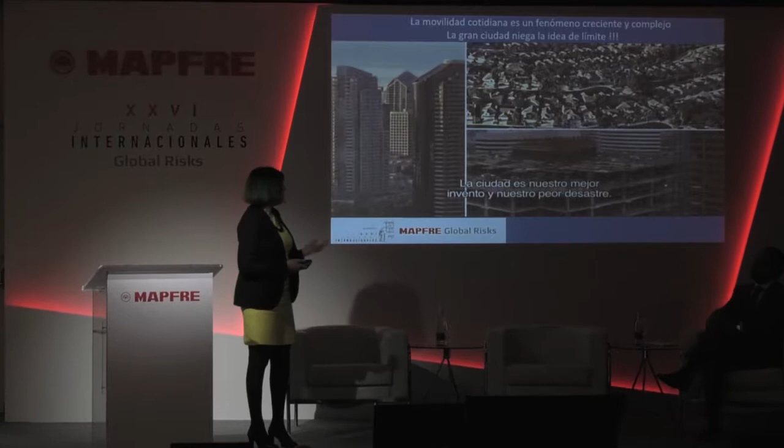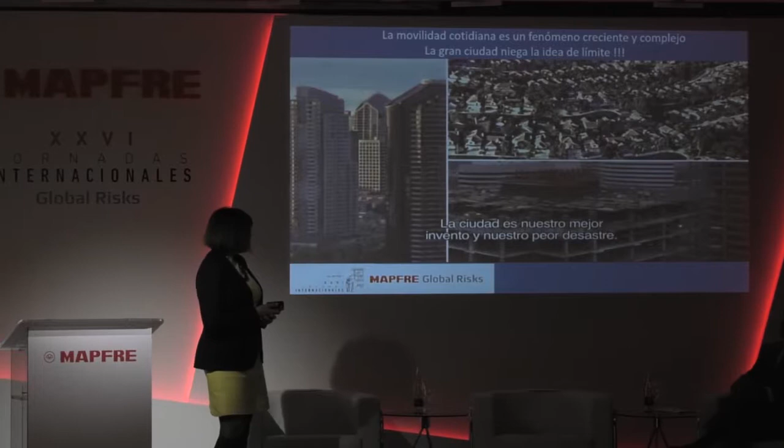I want to start saying that in 2050 in the world there will be over 9,500 million people, and these people will live in cities. 75% of these people will live in cities. Daily mobility is a phenomenon that is growing and it's very complex. It's something that is part of our daily life, and cities in general don't have a concept of limits. Cities expand like gas. Here we have images of different cities. We have skyscrapers and more low-rise cities. So cities grow and grow and grow.

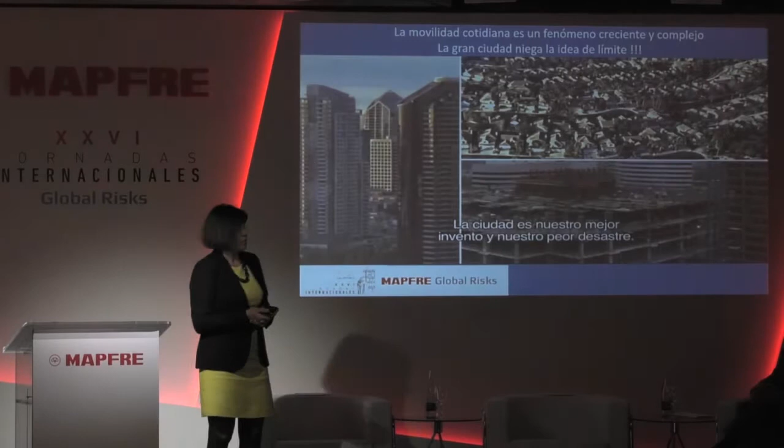And this has happened in Peru. People from the mountains moved to Lima, and Lima has grown very much in a very short period. So this urban sprawl, if not organized, can cause problems, because although cities are our best inventions, they are also the worst catastrophe. Why am I saying this? Because cities, as we know, create waste, pollution. We need to figure out mobility.

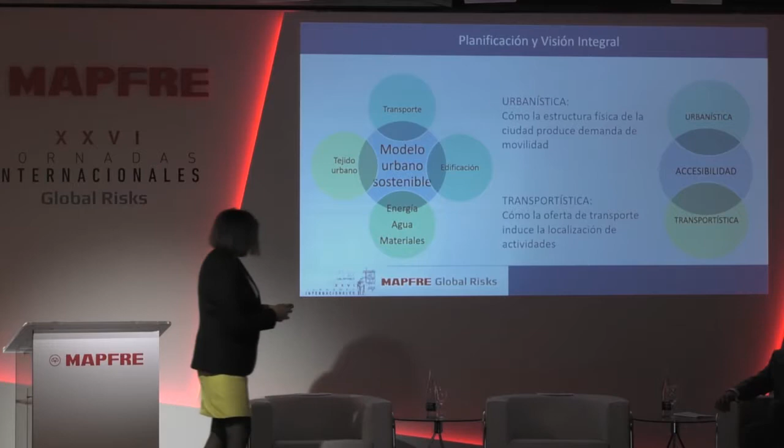What we need to do is plan with an integral vision so we can have a sustainable urban model where urban planning and transportation are coordinated. We cannot have land planning that seems correct without thinking of transportation. Land planning as a physical structure has demands, and if you offer transportation for a territory that's not planned, eventually there will be human settlements because the service is there. So these two disciplines need to go hand in hand, connected to services.

When we talk about mechanical transportation, more specifically private cars, they account for 35% of all CO2 emissions and greenhouse effect, which is one of the main causes of climate change and one of the main uses of non-renewable energies. So the environment and mobility are two very important concerns.

Multilateral entities or bodies have these as priorities. Accessibility, as you know, as the response to different barriers, physical, economical, and social, mobility is conditioned by a series of space and time conditions.

When investments in transportation improve accessibility, we realize that everywhere in the world, in all cities, lots and buildings increase their value. So when there's accessibility, the price of lots increases.

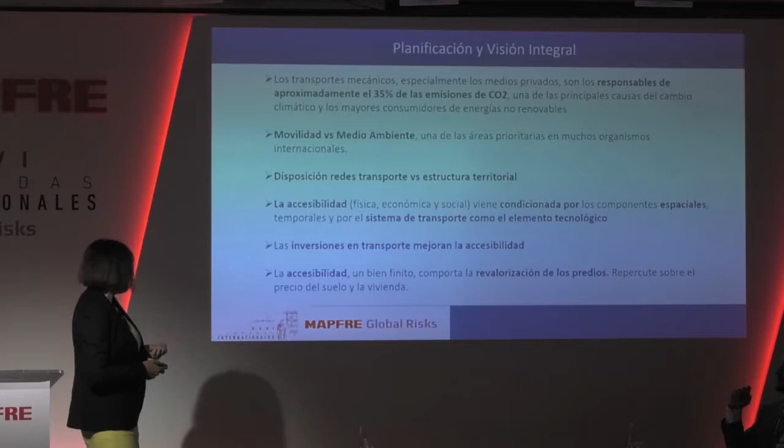An investment in transportation will favor a specific area that will be served, and in that area, assets will gain value. So correct planning is necessary.

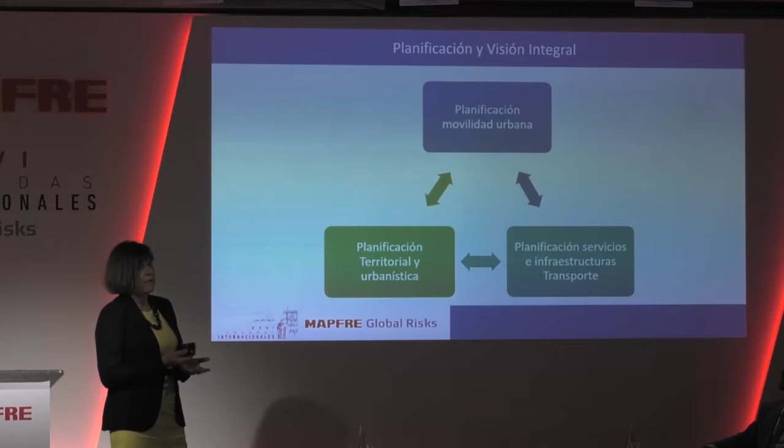So we need planning of urban mobility, territorial and urban planning, and planning of services and infrastructures and transportation. All of these three aspects need to go hand in hand.

I'm going to talk very briefly about a few examples before talking about Lima. For example, London: since the end of the 19th century, London already had a subway system. This is the London Tube network. It's a very important network, not only in terms of kilometers served, but also in terms of how it is planned, due to its long history and good planning.

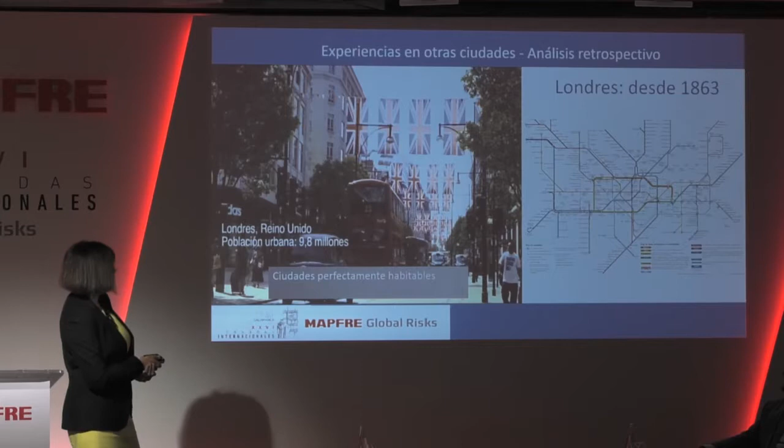This accounts for cities that are perfectly habitable. Subways have all the advantages and no inconveniences - we will talk about the inconveniences later. London has close to 10 million people, like Lima. Lima has 10.5 million inhabitants, but the difference between the two cities is very different. London solved this issue a long time ago.

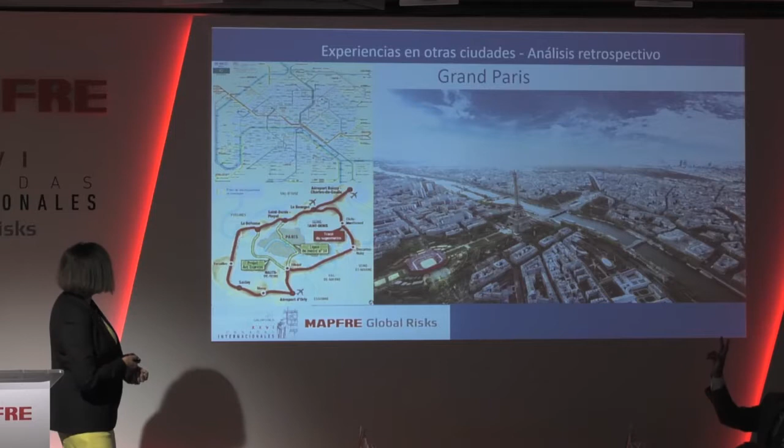Something I haven't mentioned is that networks in cities that have had a subway system for over a century used to be axis-based from the center, because you had the feeling you had to go to the center of the city to do anything. But over time, we realized this is not the case, because going to the center isn't always the most convenient way, sometimes it makes the trip longer. So a ring is being designed in Paris - they already have a peripheral surface train, but now an underground ring is going to be added.

Here we have a more modern subway, the Seoul subway. Together with Shanghai, Seoul has one of the largest networks in the world. It has almost 1,000 kilometers, and they were inaugurated in 1974. Countries like China and Korea, when they start doing something, they do it big time and surpass everyone.

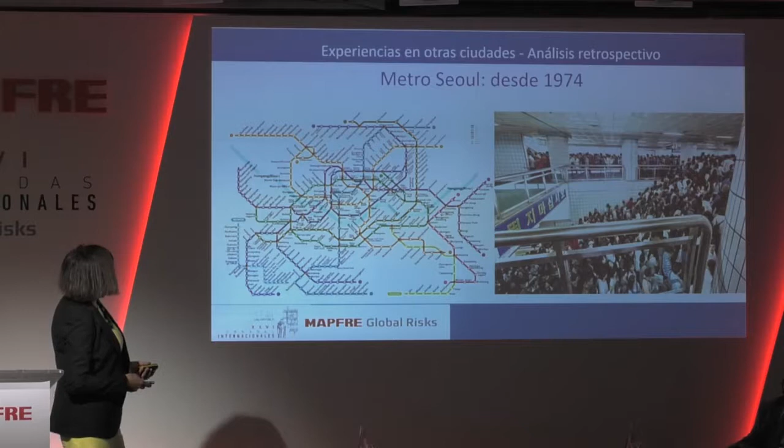Here we can see this hive of networks. It's not that axis-based. The advantage of starting late is that you can learn from the mistakes of your predecessors.

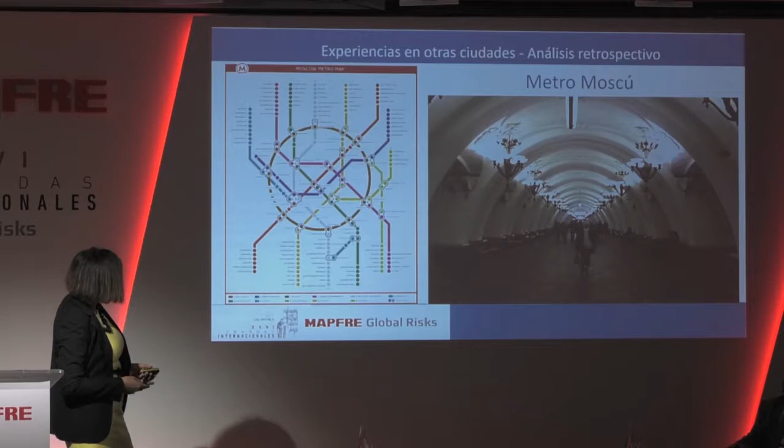This is the subway of Moscow. It was very axis-based, but then it created this ring. So the initial network was based on axes or radii, and then it created the ring. And the aesthetics of the metro are just amazing.

We also have other transportation systems, because it's not only about heavy subway. We have other types of transportation that work for short distances. Subways have stops that are usually not longer than 1 kilometer, stopping and going constantly.

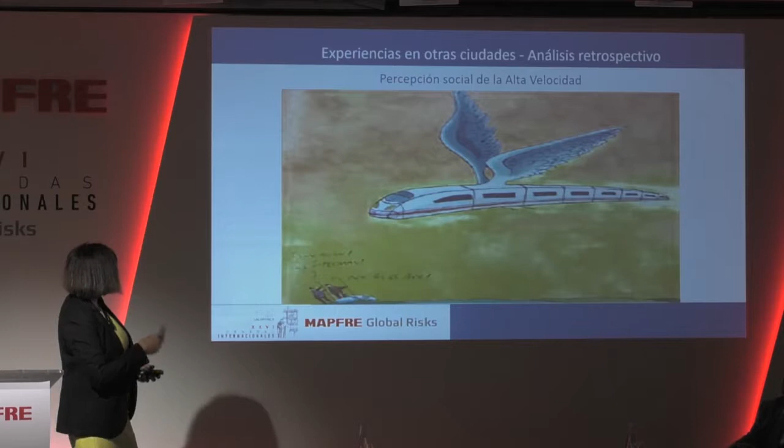So for longer distances, this type of solution wouldn't make sense. We have high-speed trains, great for large distances. Whenever I show this image, I try to explain how people think of high speed. It looks like Superman, but it's not Superman, it's a high-speed train.

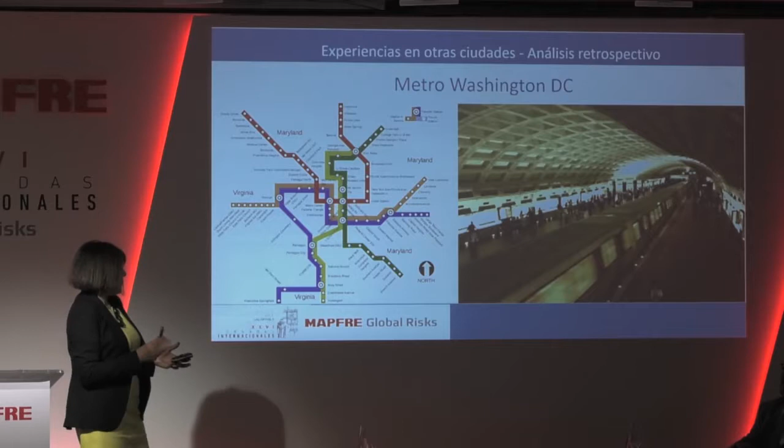Here we have the Washington subway. I visited the city for different reasons. Its aesthetic is really beautiful, very similar to the Central Railway Station. It's very limited because the city is not that large, but the network is adequate.

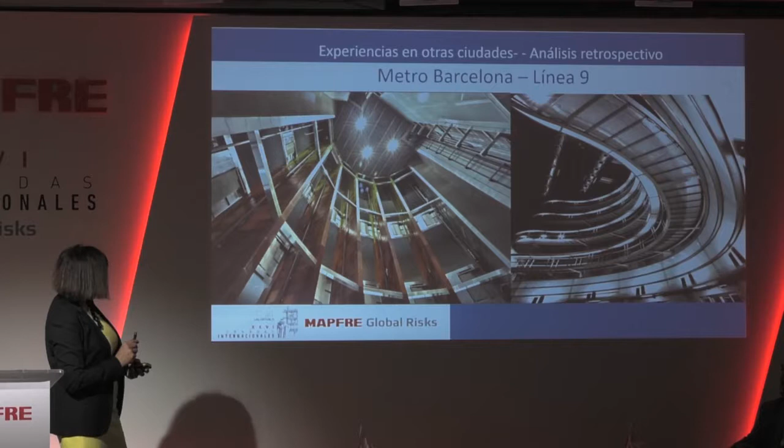This is the aesthetic of the subway in Barcelona. I'm a Barcelonan native, and we're very demanding when it comes to design.

Then we have tramways. Transportation is meant to respond to specific demands or issues, and we can't use solutions that are too big for what we have, like having heavy metros in a city of 500,000 people, because that would be wasting public funds.

When we talk about BRTs, these are just off-the-road lanes for buses. Here we have two examples: Bangkok's BRT and Bogota's BRT.

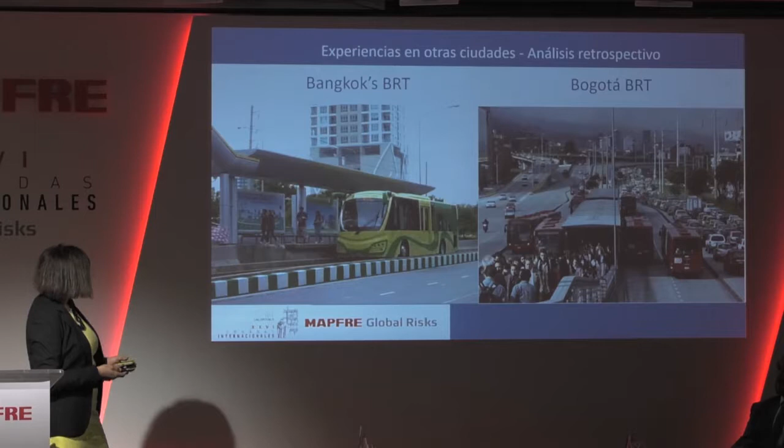I don't know if there's anyone from Colombia here, but they've been in Bogota, and they've been going back and forth on what the solution can be. But BRTs together with subways and other different means of transportation will end up solving Bogota's transportation issues.

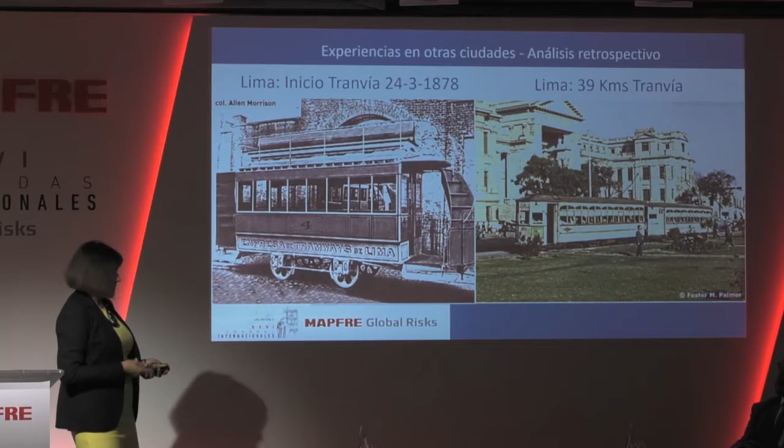Lima had one of the first tramways. It's very interesting that in 1878 it already had a tramway, and it had 40 kilometers of tramway that went all the way to Chorrillos, a place where there were waterfalls near the coast.

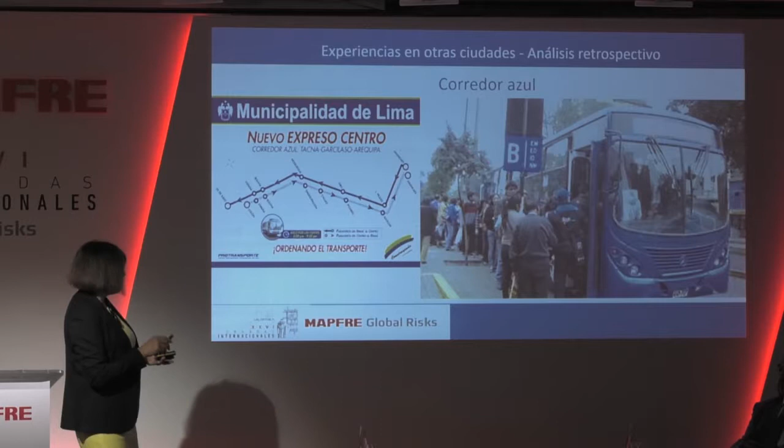We already have an off-road lane — a BRT, which is solving some of the problems. Lima already had buses too, the so-called blue lane buses.

When Line 1 was designed as an over-the-road, elevated line, it creates an architectural barrier in the city. That's what happens to elevated subways. Tramways are different. Tramways are smaller in terms of the cars.

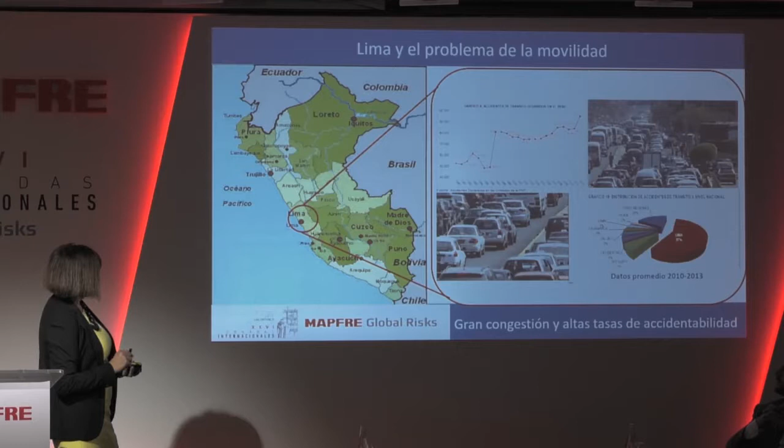We have seen different images of how chaotic mobility is, and here we have some figures of traffic jams. So it is really in desperate need for a mobility change.

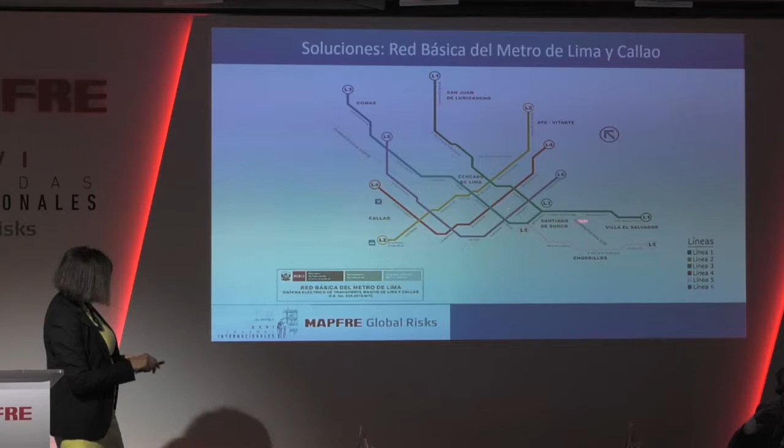Here we have the mountains, and here we have Line 1 that runs from north to south, and Line 2 runs from east to west. Then Line 3 has been planned, along with Line 4, Line 5, and Line 6.

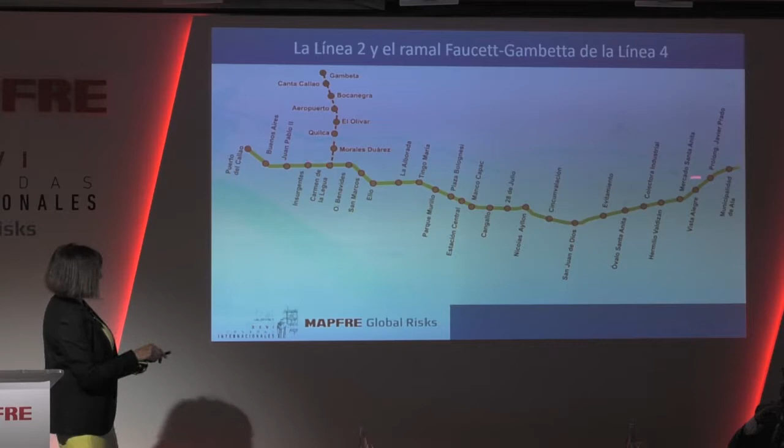If we zoom in on Line 2, here we have the north, so it runs east to west. It runs from Ate to the port of Callao on the coast, through very centric and emblematic places like 28 de Julio, Plaza Bolognesi, which has lots of examples of heritage, and Estación Central, where the Museum of Lima is.

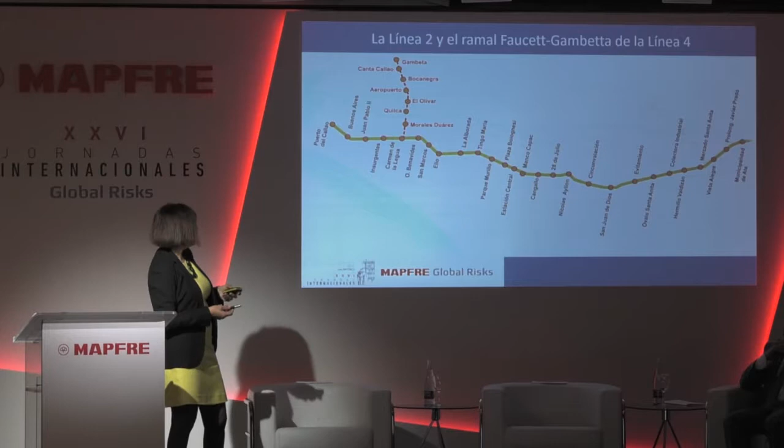Then we have another station, Carmen de la Lengua, from which there will be an additional parallel line all the way to Gambetta. This line is destined to serve the airport, and it's not known yet whether there will be an additional shuttle or how it will be connected to the airport, but that additional line will be connected to it.

So there was a tender, and it was awarded to a consortium with broad experience on a world level. It's led by the ACS group. Iridium is the brand in charge of the tenders of ACS. I work for Iridium, and Dragados is ACS's brand when they're building. Those are the leaders of the consortium.

Iridium has been the first company to receive awards for 13 years in a row. Then there are other companies: FCC, COSAPI, Ansaldo Breda, etc. Salini Impregilo is in charge of different aspects. Ansaldo STS, now Hitachi Rail, is leading the strictly railway infrastructure, and Ansaldo Breda is in charge of all the rolling stock.

Actually, the trains are built in Reggio Calabria, Italy, and they come by boat through Panama to Lima. This consortium has over 3,600 kilometers of experience, many of which have been made with tunnel boring machines.

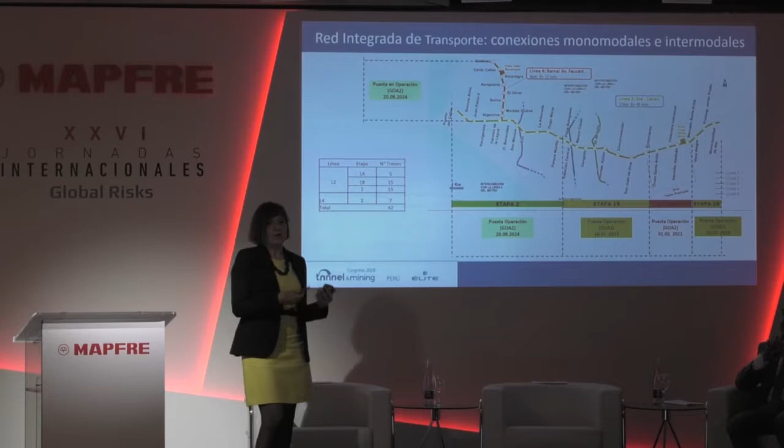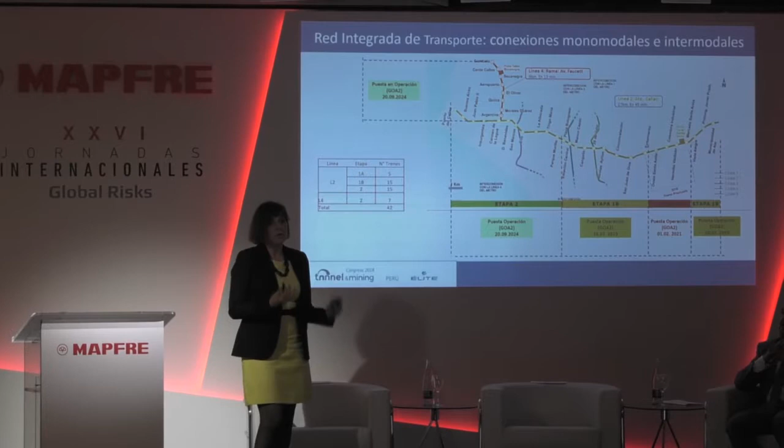If the concessionaire were here, he would say otherwise. But the person who provided us maybe was not ready to tackle this type of infrastructure and did not have the know-how, or did not calculate properly how long it would take to deliver those terrains free from taxes, free from loads.

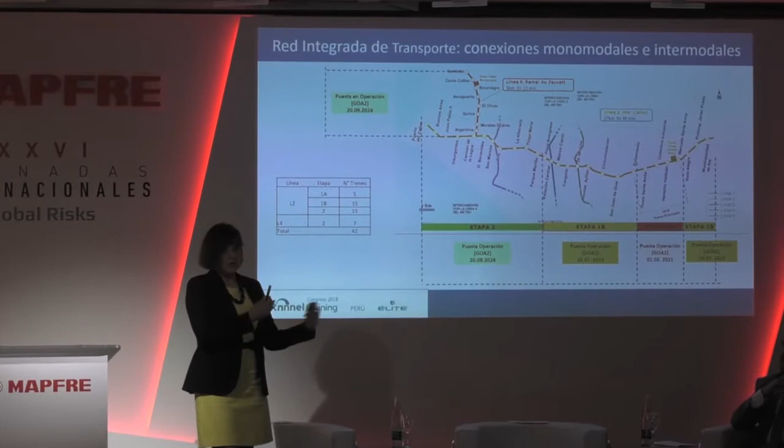Because we are not talking about places falling into a category of eviction. Some of them were experiencing problems with sewage. We have optic fiber, and different areas where water pipelines are crossing. So this is not something you can manage overnight.

And when you have to hand in the terrains, obviously they were not clean from all these different types of services or interferences. That's why there's been a great impact on the critical route. It could have an impact on other activities that were not part and parcel of this critical period.

But anyhow, as of today, we have committed ourselves that on the 13th of December last year, there's been an addendum that is zero. There is going to be no increase in the price.

In this case, the license is a price that has been set or fixed. It's a key that they give you in hand. If they don't ask you to provide extra works, the risk for building is just your own. If the terrain is better or worse, that's it. If it's worse, then you will have to put up with it, you will have to invest more money. But you cannot claim that the person who gave you that should pay you more money.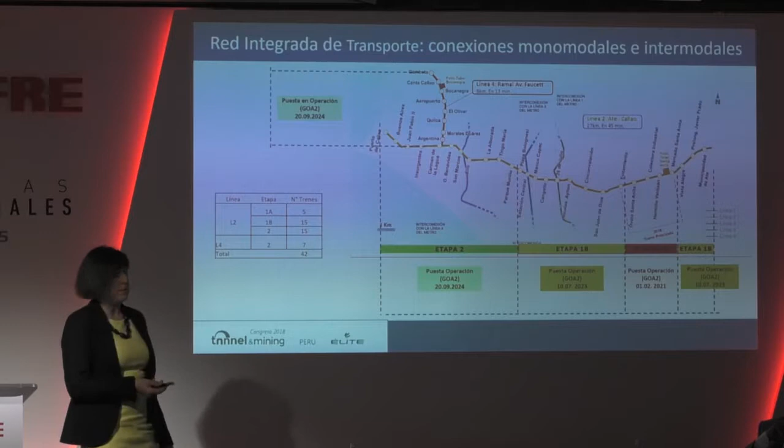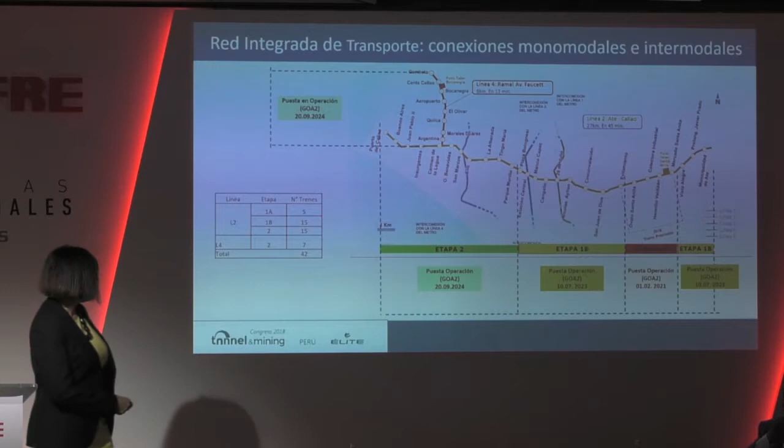July 2023, and final part is September 2024, always in GOA 2. This is going to operate with a fleet of trains that are initially 42, manufactured in Reggio Calabria by Ansaldo Breda, now Hitachi Italy, with 5 trains distributed for that first part.

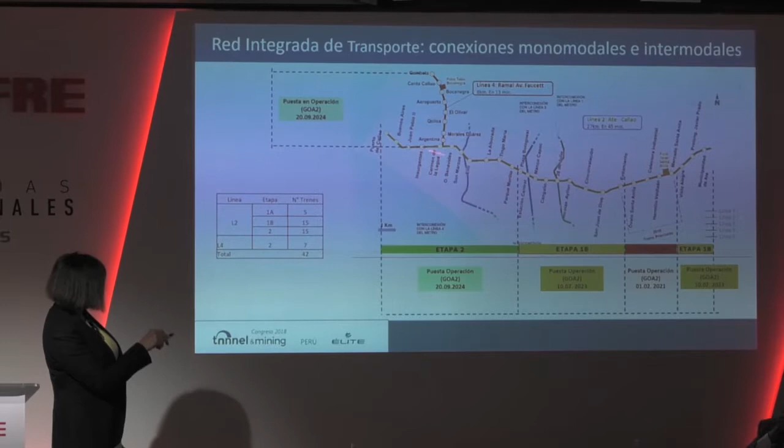They're going to be circulating. We also have a reserve of 5 for the next phase. 15 plus 5 is 20. Another 15 for the second phase of line 2, and 7 that will go through the branch. So 42 in total. But this is not the total amount of trains we're going to count with, because the demand is not the same at the beginning as at the end. So these 42 trains may turn into 72.

That's why infrastructures are being built accordingly. The trains have 6 coaches, and maybe they're going to have a 7th one if necessary.

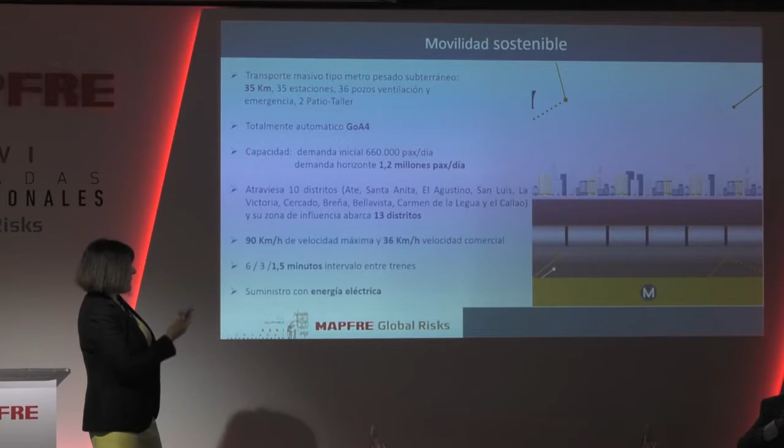I had already told you that this is the first heavy subway, totally automated, from Peru, with these 3 features. Very few in the world are like this. We have a lot of heavy subways, but they're GOA 2, not GOA 4. There's a lot of light subway that's GOA 4, but it's not underground and it's light. So really having these 3 features is going to be a unique example.

Our initial demand is 660,000 travelers a day, but the horizon demand is more than 1 million. For example, in Barcelona we have 11 lines, 100 years old, and among all these lines it carries 1 million passengers a day, around 365 million a year.

That means Lima is very much delayed as far as metro is concerned. They should have had a subway a long time ago. Right now there is only 1 line, and 1 branch has a forecast of 1,200,000 people, which is not something logical.

It crosses different districts, but it provides service to a railway influence area of 13 districts, which is 2.5 million out of the 10 million that live in Lima.

The maximum speed is 90 kilometers an hour, but the commercial speed is lower because the stations are nearby: station, tunnel, pit, and so on. Gravity centers, and the same for pits, there is about 1 kilometer of distance. So the commercial speed is obviously lower.

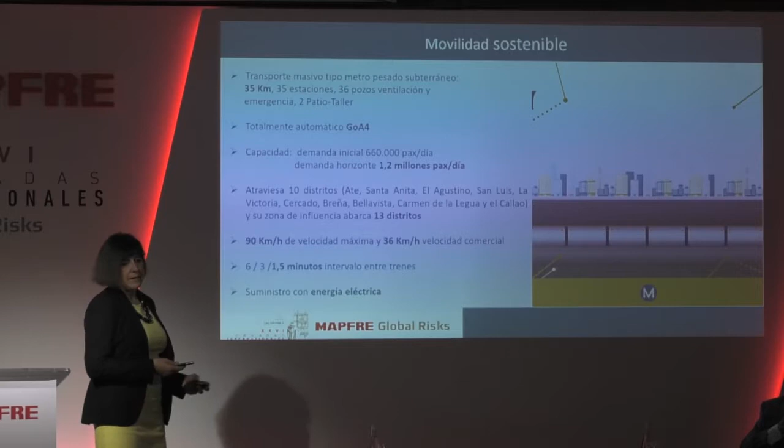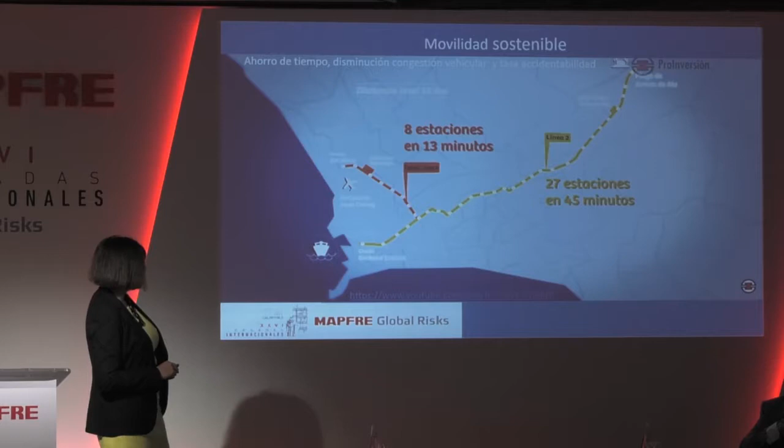This runs with electricity, which is clean energy, and it supports sustainable mobility. Going from one side of the line to the other has normally been done in 2 hours, and now it's going to be done in 45 minutes, and the branch is only going to have a trajectory of 13 minutes.

We believe that this line is going to improve environmental quality. There are no greenhouse gases in the equation, and no other type of pollution such as visual or acoustic pollution. If we want to recover the surroundings, and there are policies for doing that, we can make it a more friendly environment for everyone, for all the inhabitants of Lima.

Universal accessibility is a key factor. There is always something adapted, maybe not necessarily for a person in a wheelchair. Anybody can be a handicapped person because they broke an ankle, or because they are carrying a pram, packages, or suitcases. Also, for people with visual impairments, they're going to use different types of cues so they can walk, and that's going to be an improvement in quality of life.

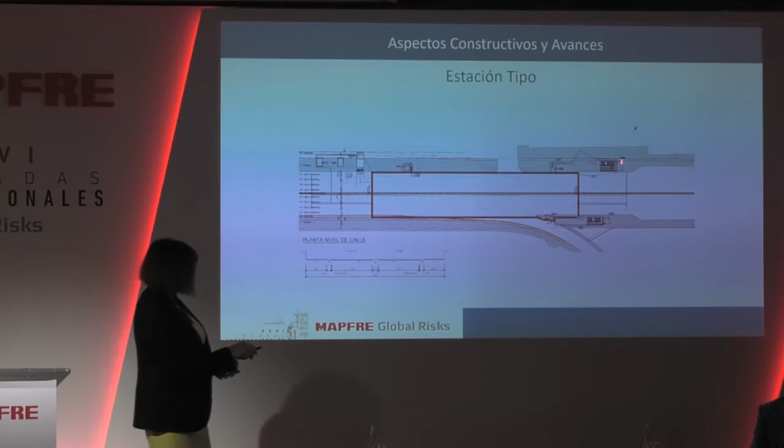Here we would have the tunnel, the exit, the station. We have a series of boxes that are buried, with those elements being the only ones we shall see on the surface of the city, which are access points, staircases, lifts, emergency exits - something that's totally level with the surface and is inserted in the city. All types of materials, cables.

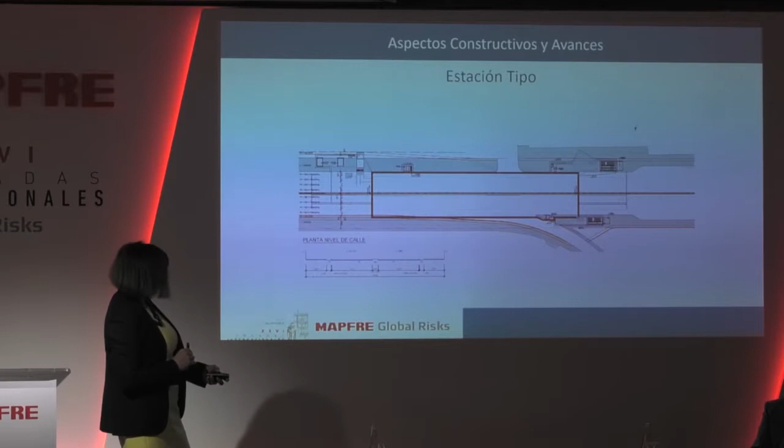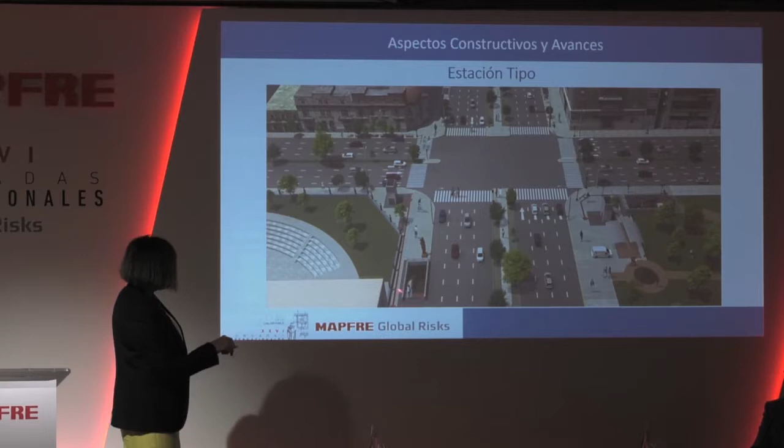The arms may be longer or shorter, but in essence, this type of station would look like what you can see on the slide. So what we're going to see on the surface is an elevator, lift, because we must have stairs, normal stairs, ventilation, etc. If we had another type of cut, this is the axis of the tunnel.

All stations, the 35 of them, would be built with cut and cover, or the Milan method. This system consists - before I explain what this method is about, let me say that generally speaking...

Trucks go under roads, under streets, because it's less risky. That's the easier thing to do, not economically speaking, but you don't have to expropriate buildings, and it only goes through the corner of one building, and maybe there is a curve or counter curve - that's normally how it is done. So what you perform here is to drill 2.5 meters.

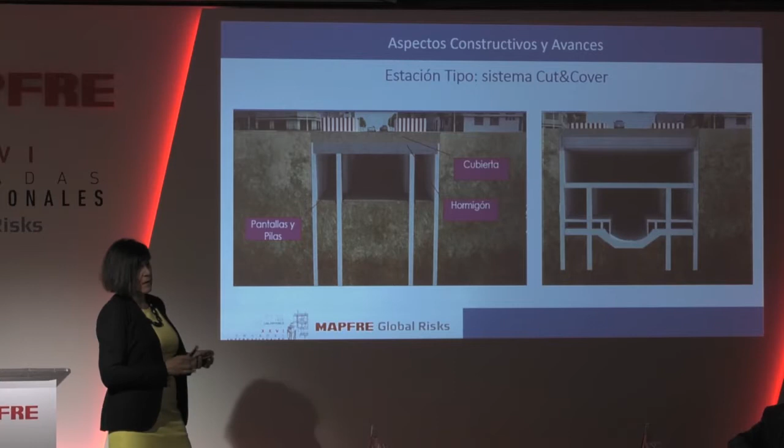This is a render. Then you build both parts and the tracks. This is lateral, but this is a mistake, though this is what we agreed upon. Subway lines should have terminals with the central platform, but now we don't have any case of central platforms. All of them are sideway platforms. But of course, we're not free to do everything we wanted to do.

This is a summary of what we're doing. Here you can see the main road of Lima with a lot of traffic, because all products coming from Sierra are going into the city.

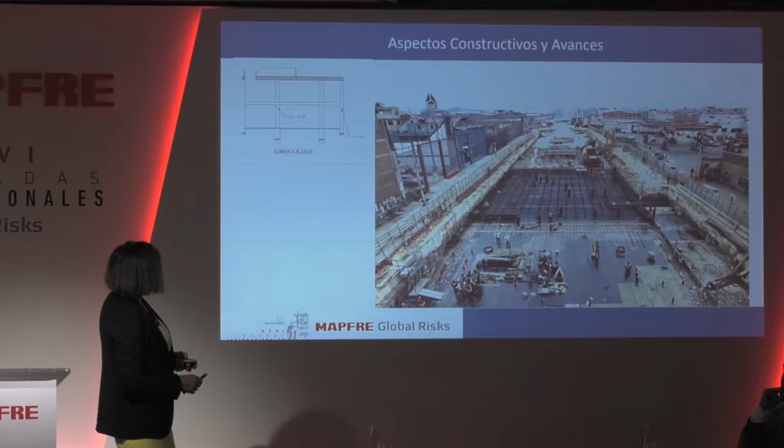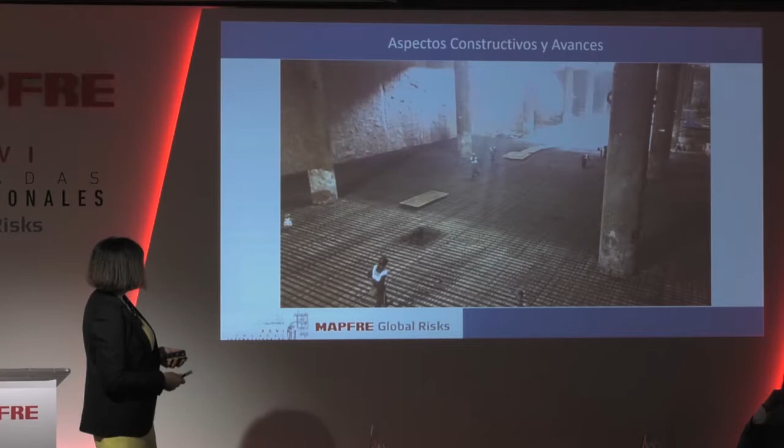Here we are seeing the cover, the main cover. We are emptying concrete. Once you drill, what you find are the screens and the piles that are already covered, because it's there in the station. It's a way to embellish it from the architectural point of view. Then you go to the bottom, and you cover it as you need it. We have a hollow so that you can see the light, to extract the land. Maybe later on we can put staircases or something there.

This is a current picture. So we have a hole for stairs, platforms are already done, some rooms. This is the first part in red that I showed you in a previous slide.

And in February of 2021, pits, 2 different types of pits: some are lateral, some are not. Basically, in this area, this is associated with a type of construction. There are 16.5 meters of diameter. The whole line is a sub-line, but it's quite superficial, because it's about 20 to 25 meters deep.

So we cannot be talking in comparison with line 9. That was hell in comparison with this. This is paradise, very superficial.

So these pits are done through rings, top to bottom. This is a new Austrian method. We advance, ring by ring, top to bottom, till we get to the bottom. Then we put the iron, and this is architecture.

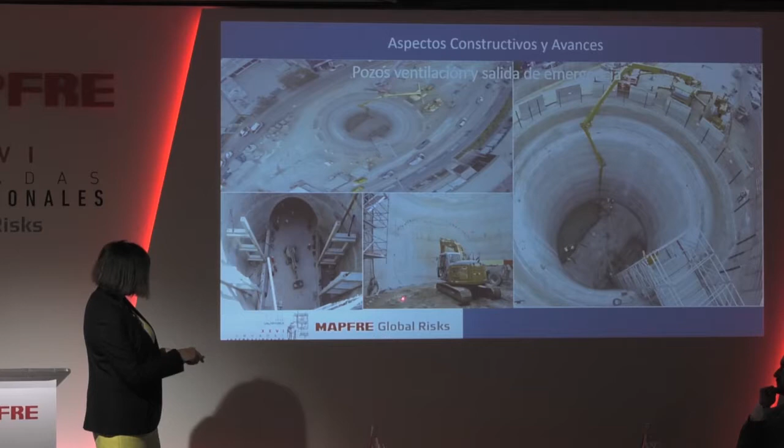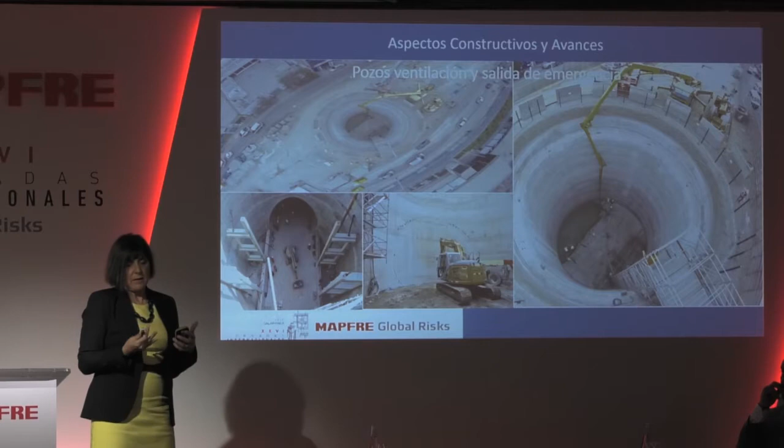So as I said before, we mark the first section of the mouth, then we have a pilot 12 meters long. It's a very resistant material, but it stays like, we could compare it to cheese. But it is good to protect it with a kind of umbrella. This is the new Austrian method.

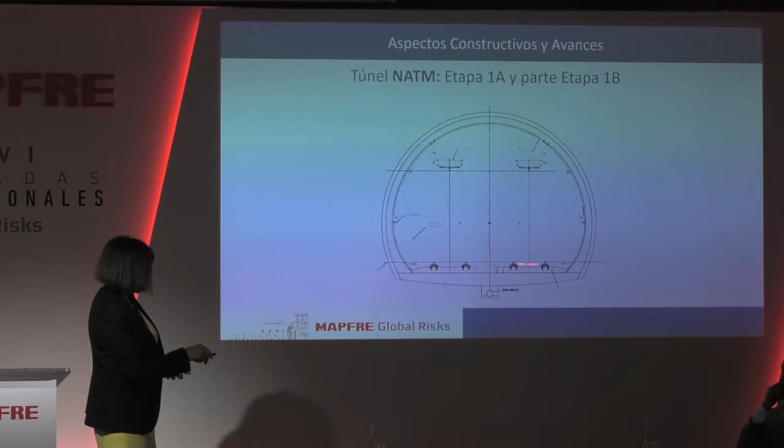In phase 1A and one part of 1B, trains are on the same level. If we're building and there is any problem, it's not the same to be in a tube one way than to experience a problem on one side but not the other. But of course, we have to make a cost-benefit study.

And we also have the neighboring parts. Out of the 35 kilometers, some is dry land, and the rest, 25 kilometers, is done with the use of tunneling machines.

When you are drilling 1.25 to 2 meters of distance, first you use these materials to create projected concrete with metal fibers with a layer of 5 centimeters.

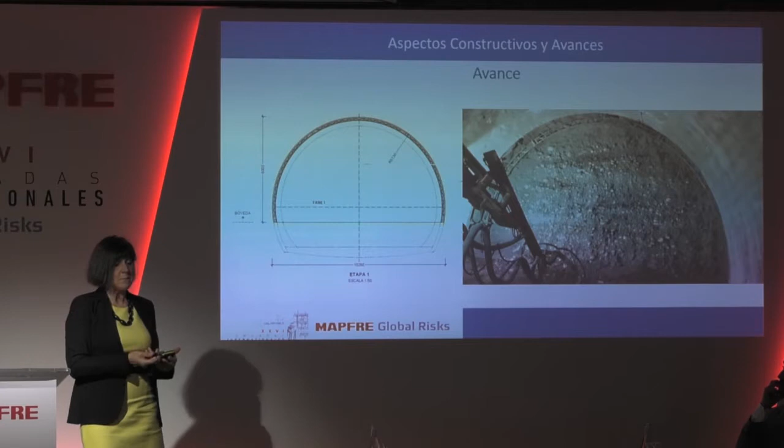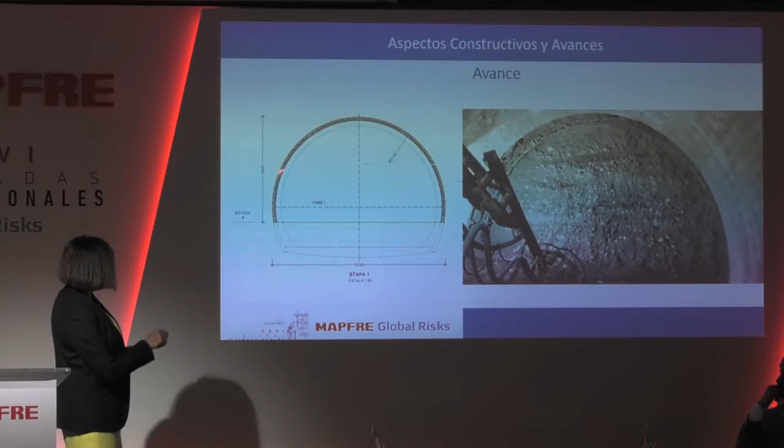This is how it looks. You can see those ribs, which are the lattice work, and concrete is there. So as I said before, once we have advanced, then we break, drill a little more, and then we make it concrete.

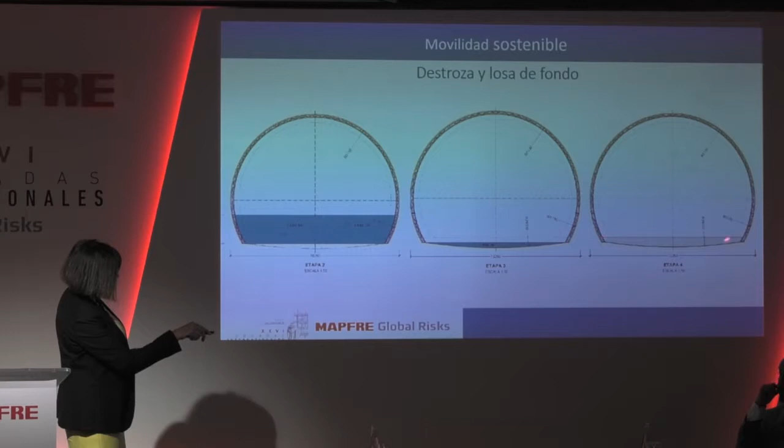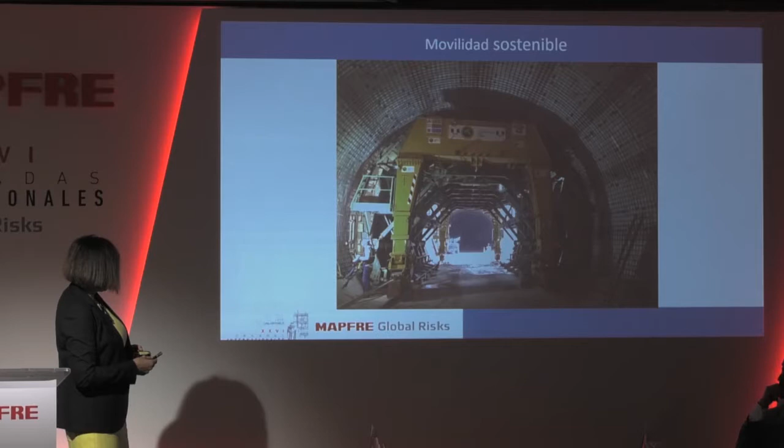Then we protect it from water. Then we have the steel work, and then comes the car that empties the concrete out, takes the concrete out. So that's how the tunnel is going to look.

We have already completed around 7 kilometers. These are the transitions. It's really easy to access and very clean.

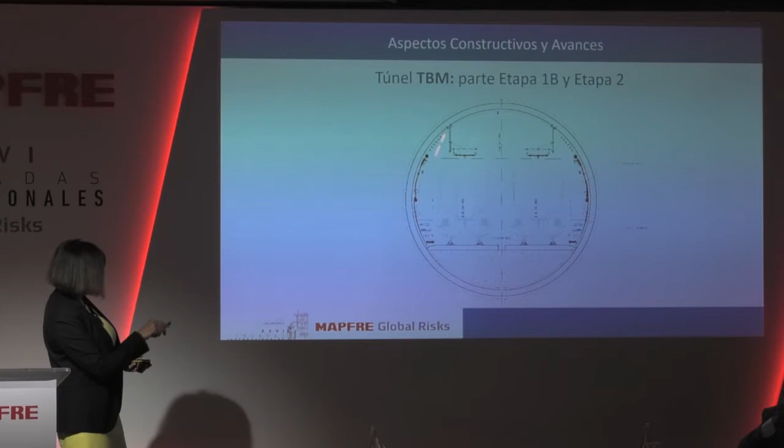Here we have the tunnel with TBM. The TBM has 10.24 meters exterior, and we have the trains at the same level. On the sides, I'm not going to explain this, but we have the evacuation passerelles to meet with NFPA standards, all the cables, etc. We have the catenary here, or the overhead line, and these are the tunnel boring machines.

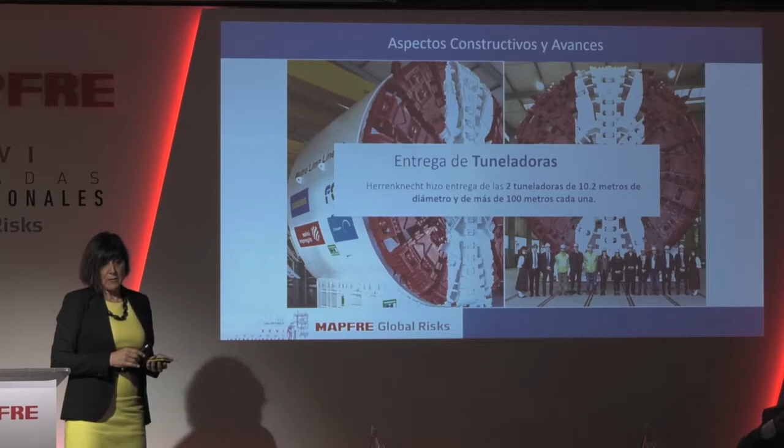We designed them with the support of the manufacturer, Herrenknecht. They were totally reliable, the leaders of the market with 70%, and they may seem the same as others, but they're not. This one is for dry land, and that one is ready for underground water. The one for dry land is 170 meters long, and the other one is 150 meters long.

Here we have the tunnel boring machines. The first one for dry land is going to access - we did this with NATM, and we are heading to Callao. So here we have a dry land tunnel boring machine, and for Peruvians this is San Juan de Dios, and it gets out in Insurgentes.

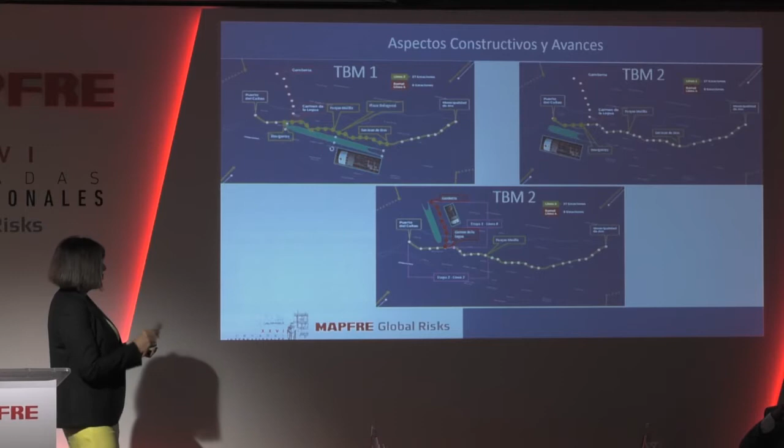The tunnel boring machines are like an industry that walks. It's an industry that can only walk forward. They can't go back. That's what tunnel boring machines do - they either go forward or they stop.

If you have any problem, like what happened in the Eurostar tunnel, they need 4 pre-made elements built in a keystone plant. In this case, we have 6 keystones, or the final, closing keystone. They're not all the same, because if it were a tunnel that only goes in a straight line, they could be the same. But since you have curves and turns, they end up being different.

So each piece has a number, and they are inserted in rings within the tunnel boring machine, placed where they need to be placed. They can't just be placed anywhere.

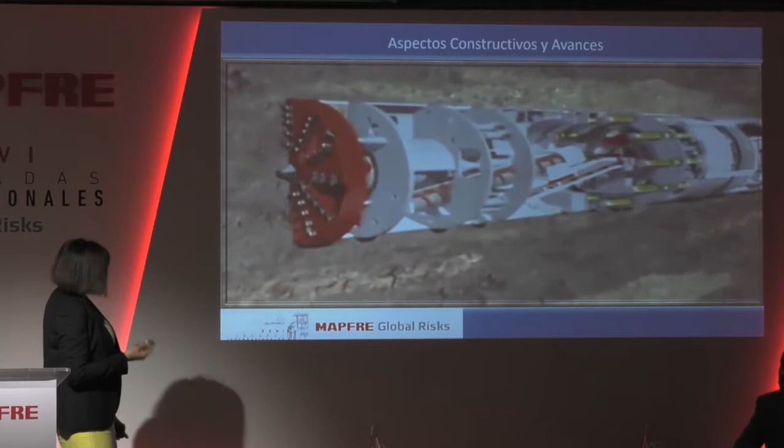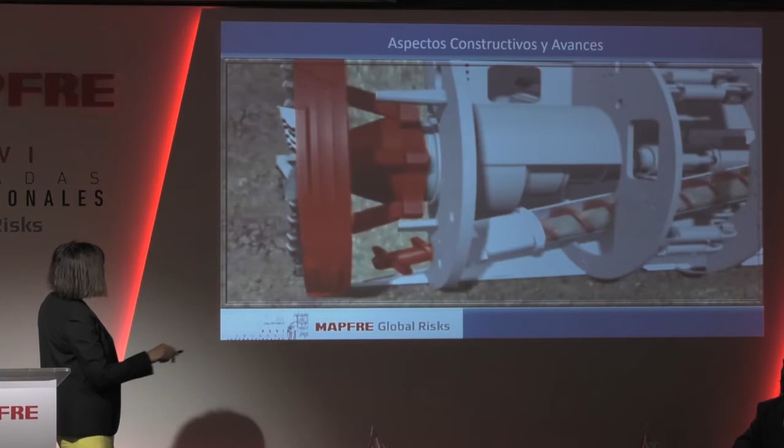Here we have how the tunnel boring machine works. This is a render - here we have the front with the cutting structures, the discs. The land is in a beige color. Here we have the endless screw.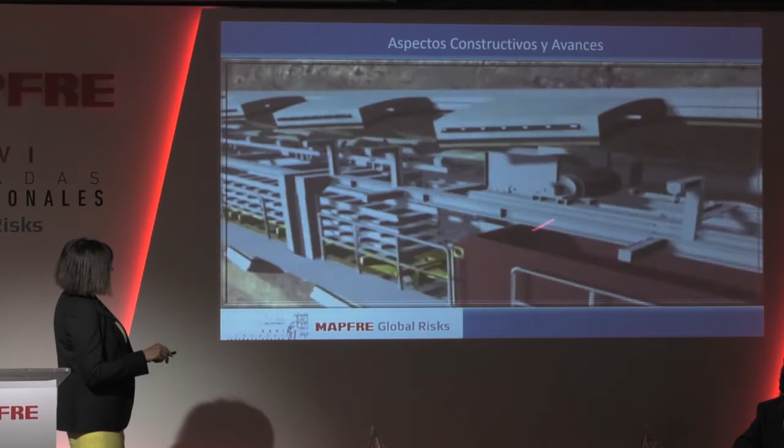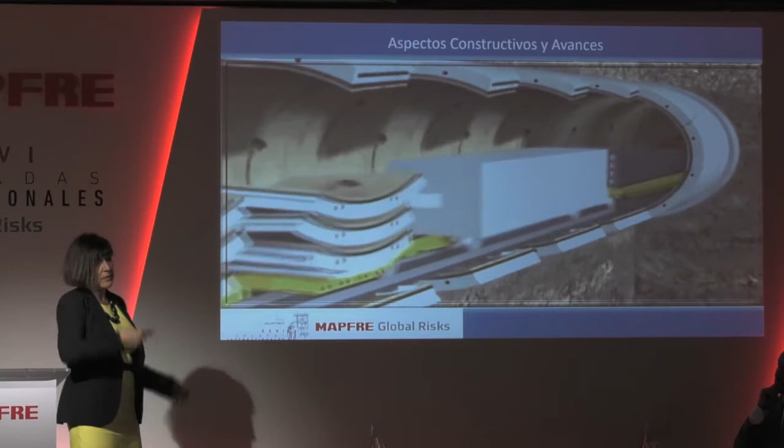This is the same mechanism that's used in mining. If you are close to the exploitation well, you can use the belt, and if you're closer to the end, you can have other options. It's contained in a container, placed in an additional path that will serve to evacuate the soil where the trucks are waiting.

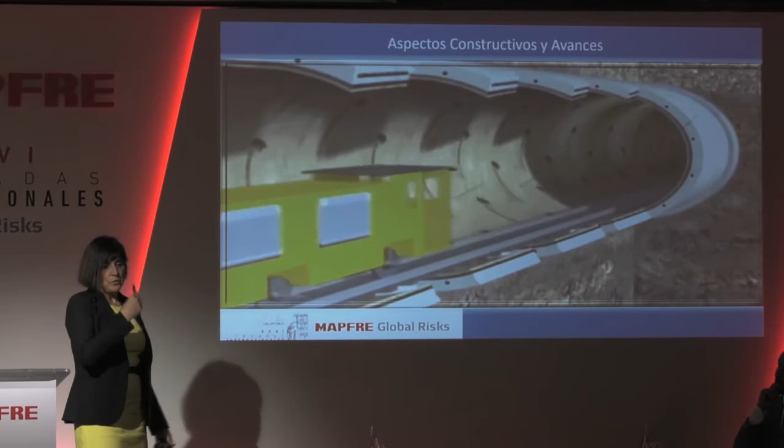And that's the conduit used for inputting water and different inputs.

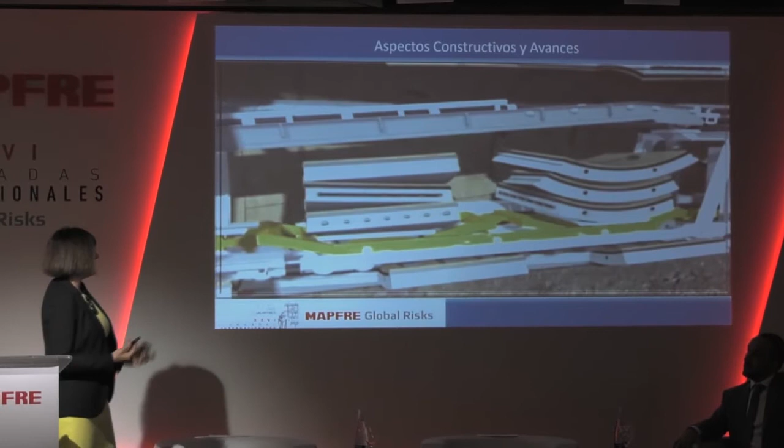Many people are working in the tunnel boring machines. He has a dashboard with different inputs, and those inputs need to be compared with the monitoring and control that we do on the sites to see how the terrain is moving and how buildings are reacting, because that's very important when you are estimating.

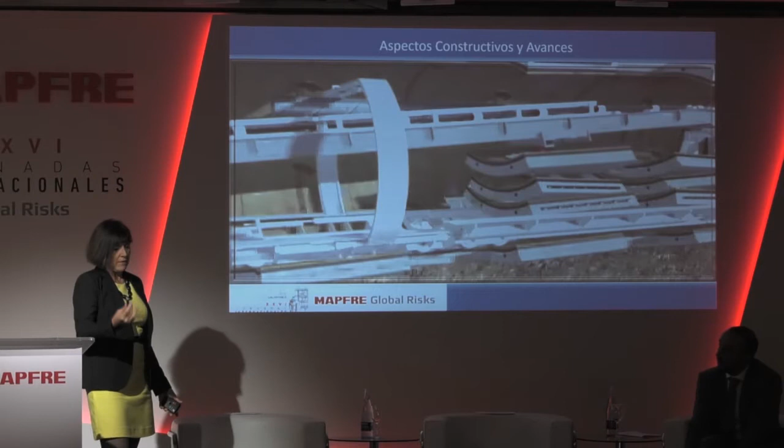Software can be complicated. When you enter data, you get results, but you have to see whether at the end of the day those results really make sense and are in line with what you're seeing on the surface, and what buildings are doing.

Here we have an arm that's called the erector arm of the tunnel boring machine. It gets the keystone through suction, places the bolts, and locates the keystone where it needs to be placed.

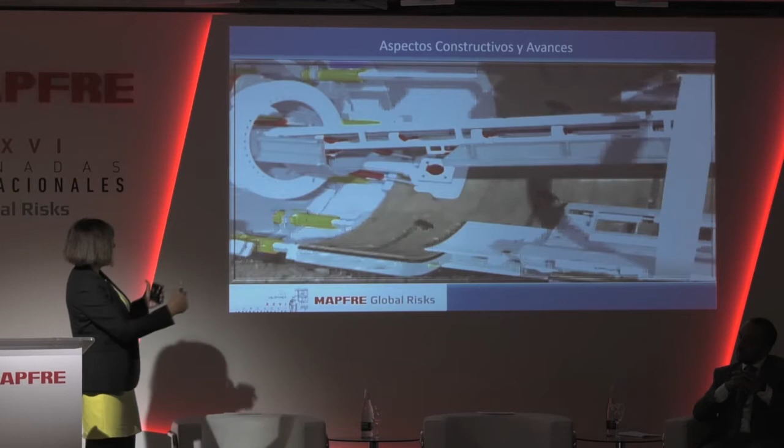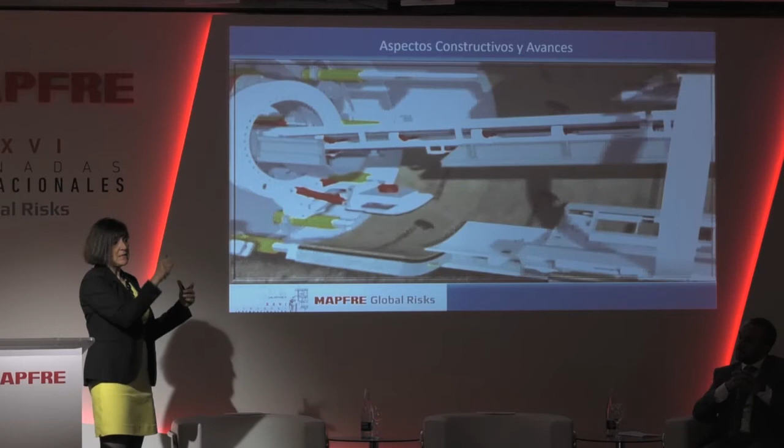How does it advance? Well, there's a jack here that is supported on the previous ring, and that's what gives the machine the possibility of progressing while the discs eat away the soil, and that soil falls into the chamber. So the last keystone, the closing keystone, is placed.

It has a rubber band, and that's how we have the ring ready and how we progress. Another important element are the...

We get high current at 60,000 from the company, which in Peru is an awarded company. From there we take it to the substation where it's converted to 20,000, and from there it goes to another substation. I'm talking about alternate current, so we go to 1,500 continuous that feeds the overhead line, and then it goes to 220, 30, or whatever.

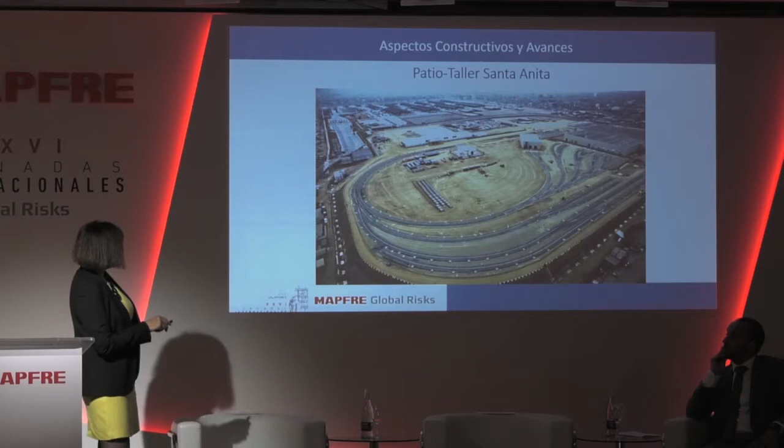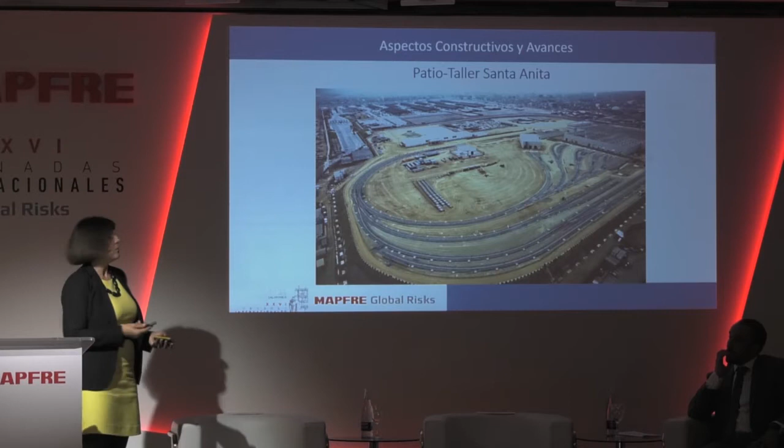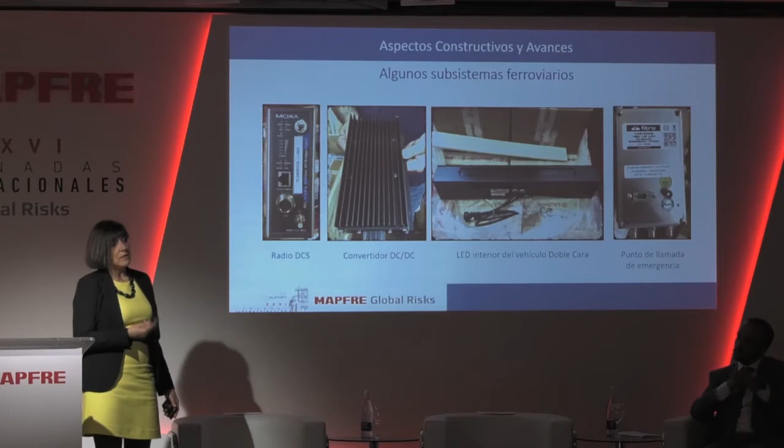This is just a sample of the different railway subsystems. I like to say that a subway is a system, and there are thousands of subsystems like escalators, platform doors. Here we have the PA system, emergency points, and so on.

There's something I haven't mentioned yet, and I don't have the slide for it. In a GOA4 system, you can't survive without platform closing doors. There's no driver, so you can't have an automated system without platform closing doors. The closing and opening is synchronized with the train and with the platform signaling. There must be total connection with all the elements, because otherwise we can have failures.

So here we have the different automated systems, the different levels of automation. GOA1 is a classic operation. It only has ATP, the Automated Train Protection. It only has that protection.

Then GOA2 is the one that usually works in the subways of cities that have been there for years. It has the ATO, the automated train operation, and there's a driver. And then we have GOA4, which is driverless, and GOA4 is the one we have here in Lima, and it's a UTO, totally automated.

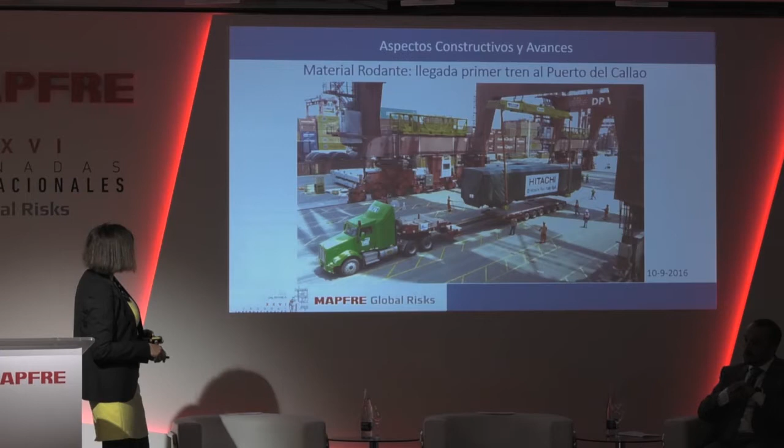You can walk from one end to the next of the train, and you can see the tunnel you are crossing. This was the arrival of the first car, the first coach, in September 2016 to the port of Callao. These are our different trains.

We have 26 at this time, and car 36 of 42 is being manufactured right now. We're going to have the trains before we're capable of working or operating them. It's a caterpillar train, and each side has an area for wheelchairs with a PA system.

There's an additional advantage, which is that in addition to having evacuation passerelles, the two sides are totally deployable - that is, a ramp can be deployed for circulating. And if you want to do that, you can't have sleepers over ballast.

Our rail is on slabs, which is very important and very positive for maintenance, for any type of activity, because there's lots of activity in the tunnels at night. When the subway stops working, there's lots of maintenance work happening in those tunnels.

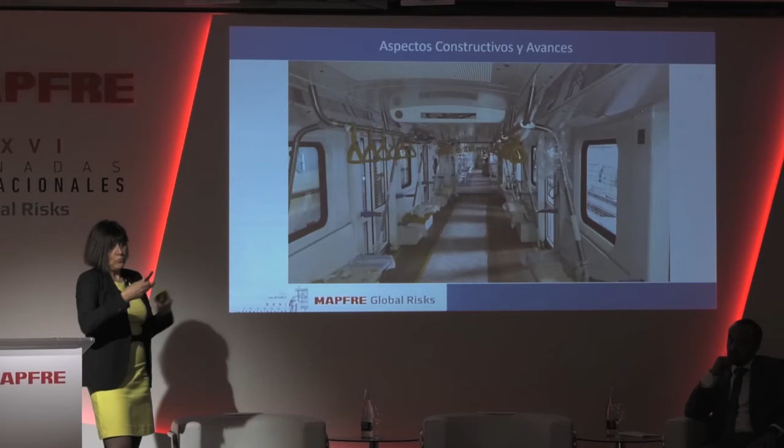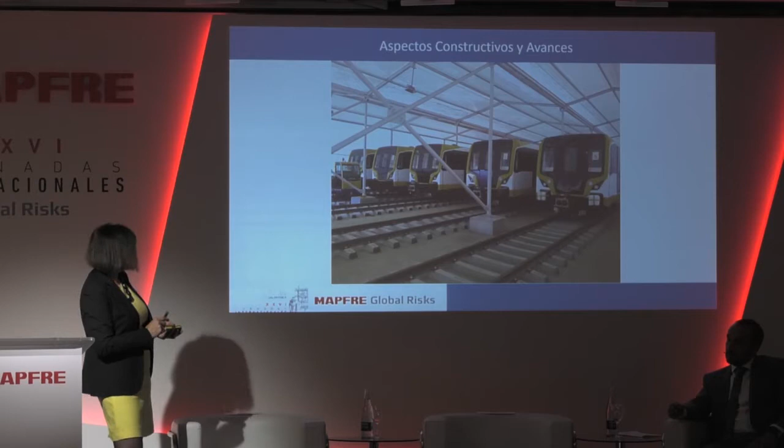Here we have the 5 trains for the first stage. They're under a roof here in Santa Anita, being maintained over these provisional rails, and we have another 28 in Punta Negra.

As I was saying, we are on our 36th car, and I think they will all be ready before we are capable of operating them.

Well, the experience in the subway of Lima is very rewarding, very challenging, because it's very complicated to build an infrastructure of this type in a country that has never had something similar. For us, this is very normal because the first line was built over 100 years ago, but in a country that has never had an underground rail, and even less so automated systems.

Well, it's complicated, but we're doing it, and we're not going to give up. What's important? Well, we have learned about the importance of risk management and the distribution of risk management in order to achieve the objectives.

We also learned the importance of the contract manager, document control, and traceability. You need a matrix, but you need to understand it, assimilate it, and manage the risk. Working as an awarded company, we have our EPC subcontractor under a turnkey agreement, and this EPC has its own contracted companies below it. Each level has a contract manager and document control. It's important to have a contract manager who knows the contract by heart, knows the milestones and what you have to pay attention to, and then document control, because there's a large amount of documents that need to be managed.